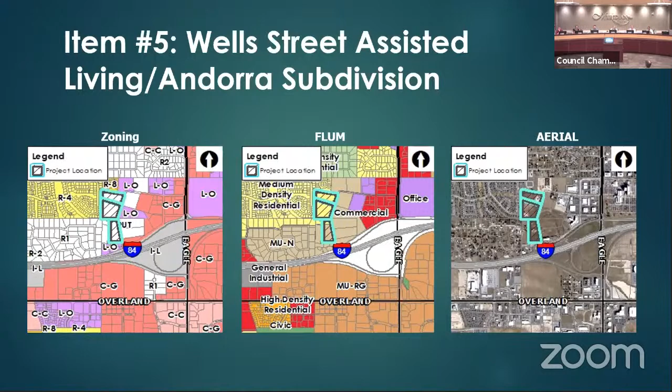A little bit about the history of this. There was a similar proposal approved for these properties in April of 2020, called Andorra Senior Living. This proposal included 76 single-family residences and a 3-story apartment building with 88 dwelling units. Following the council meeting and the approval, the property owners of a parcel that was part of this, 972 East Wells Circle, decided they weren't interested in selling the property, which basically made what was approved fall apart. So what you're seeing now is a new redesigned development that no longer contains that parcel.

The summary of this request is annexation and zoning of 17.5 acres of land with the TNR zone district. It's a preliminary plat for the north half, the northern portion, 61 building lots and 8 common lots, about 11.5 acres. There's a conditional use to allow a 91 unit, 3-story nursing and residential care building with a footprint of 30,000 square feet. I'll show you the graphics. There's also a proposal for an additional roughly 9,000 square foot commercial building, although the end user has not been identified.

There were a few administrative requests. One was to allow 61 private lots to be served by a gated community, whereas only 50 are allowed. And 32 of the required parking spaces will be provided in bulb-outs, which I'll show you. So I'm going to run through this proposal with the graphics and try to explain this to you.

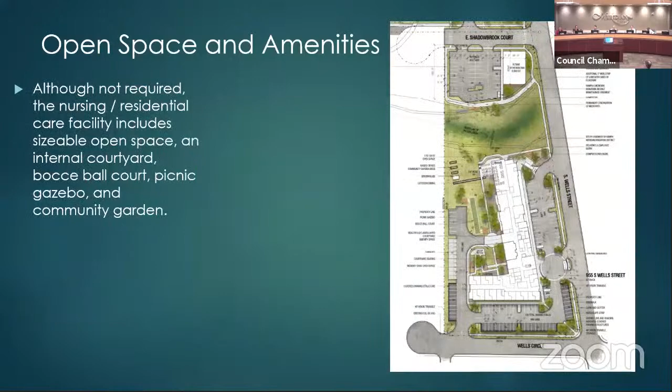There's an informal 10-foot wide pathway stubbed at the west subdivision line. Over here, there's kind of an informal pathway that's there, but it has not been developed.

The Meridian Pathways plan shows eventually there'd be a future multi-use pathway connecting to this. The concept plan as shown does actually show a direct connection. This is where that would be, and they've provided basically a direct east-west connection to this.

There are portions of this pathway that are close to 10 feet wide here, but it narrows down to probably 5 or 4 feet here. Staff is recommending, because this is eventually going to be a major pathway, that all of this would have to be built to a template of 10 feet wide to be consistent with the pathway plan.

Also, what's important to note is that the pathway plan actually shows the pathway running along 5 Mile Creek, which is here. As I mentioned at the beginning of the presentation, this piece of property here with the original proposal that was approved was part of that proposal. This no longer is part of this proposal, no longer under the applicant's control.

So we're not sure if and when this would develop. If it did develop and come into the city, we would recommend that the alignment of this pathway would match the plan, meaning coming down the 5 Mile Creek. However, in the interim, the applicant is also providing this stub here. And if this was ever developed, then this pathway would no longer provide the major pathway - it would run along 5 Mile Creek to be consistent with the original configuration.

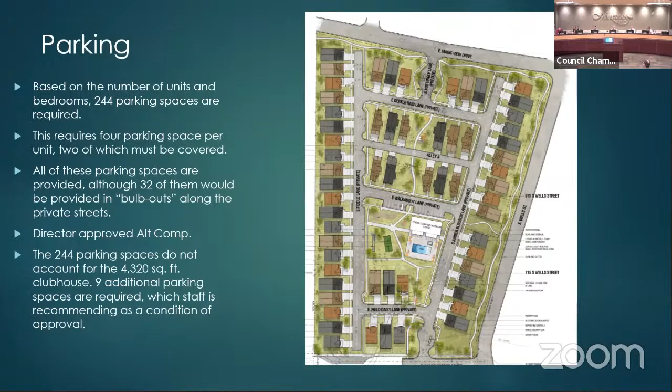For a nursing and residential care facility, the parking requirement is half a parking space per bed. This concept plan indicates 102 beds, requiring 51 parking spaces, and they've shown 101 parking spaces. For the office building, 18 would be required, and they're showing 40 on this concept plan.

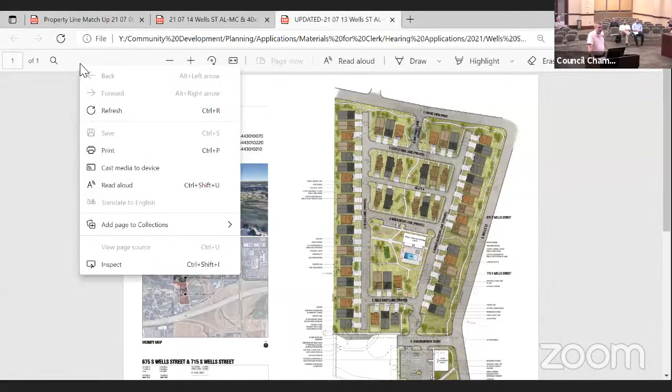Traffic is always an issue in this area. That area is kind of broken, and we don't have a solution for that, but I think that the use we're proposing, out of everything that could be proposed, tends to contribute less traffic than a lot of other uses that could come along. So we feel like that's a good fit also.

To back up to the parking for the north residential area, we are required to have 244, and through the south revisions that Alan spoke about, changing the streets around, we were able to increase the bulb-out areas and get 266 spaces, which is above the 244 required.

Again, we've tried to pay close attention to Woodbridge's concerns and modulate the setbacks and the heights of the buildings. And again, these buildings are going to be very nice, high quality buildings. So I think that works out pretty well. We think that we've done a good job.

We've really tried to minimize that wall effect that some of the Woodbridge neighbors expressed concern over. The previous plan that was approved, made it all the way through City Council, was Andorra, and that project was all single story townhomes, so that was a much longer building. The spaces in between were 3 and 3 setback side yards, totaling maybe 30 feet of open space. In this layout with the skinnier 40-wide lots, we actually end up with 200 feet of running distance, so we think that's a lot better. The design's quite a bit better than it was last time around.

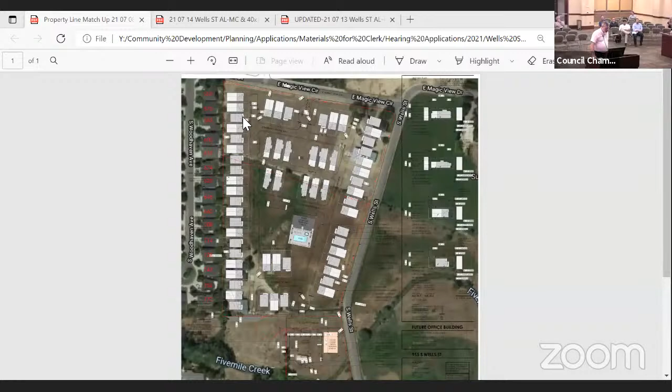Any other questions for staff or the applicant? Just real quick, I was kind of looking for a map that was going to line up the houses on the west there with what's existing. I have that - there it is. Can't figure out how to do full screen on this thing. I've been trying to make the browser go away and haven't had any luck yet. Still not seeing it. Oh, sorry. Thank you.

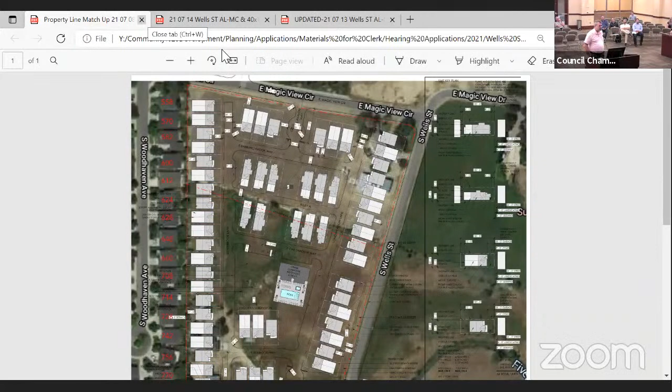Do you want me to leave that up, sir, or go back to the original plan? If you could leave it up for a minute, that's all right. For the commission. Thank you. Madam Chair, Commissioner Casanelli.

Kind of to tie into that, Alan - the 5-foot side setbacks, is that in line with R8 or R15? Bill says R8, I don't have it memorized off the top of my head. And is Woodbridge R8 or R4? They're not in the city. But if you look at the distance between the houses, when I scaled them off, it's roughly the same distance between the houses. The houses in this development are narrower, the lots are a little smaller, but the distance between the structures is comparable to the distance between the adjacent structures.

Any other questions? Sorry. Do you want to show that? I think the applicant wants to see if I have it.

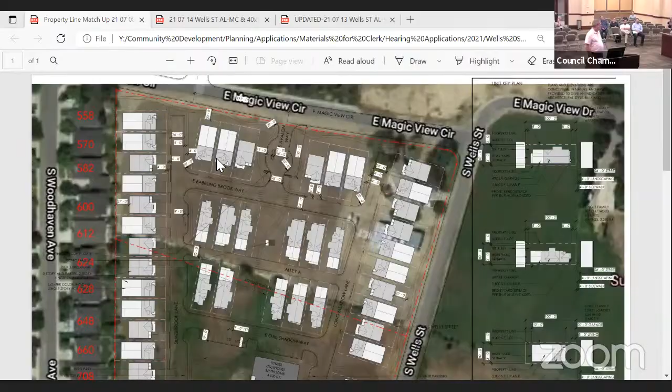Madam Chair, yes - quick question for Jamie on those houses that will back up to Woodbridge here. What are average square footages? Do you have that?

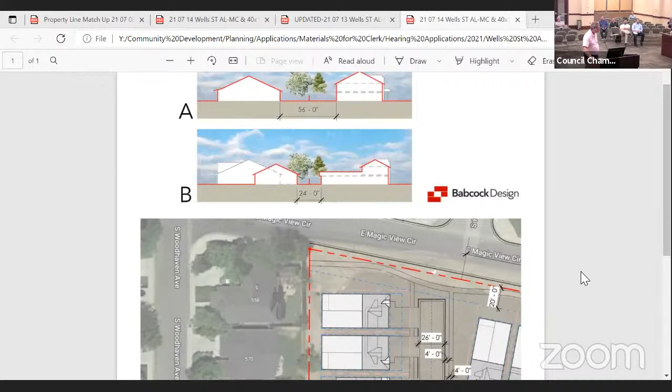You have to say everything into the mic, sorry. I don't recall off the top of my head, but they are listed on the exhibit that we submitted. Are you asking the lot sizes of the development or the adjacent subdivision? No, the average square footage of the houses in the development that back up to Woodbridge. I believe, including the garages, around 1,800. Obviously you've got some 2-story and some 1-story in there, so it's going to be some smaller and some larger. Okay.

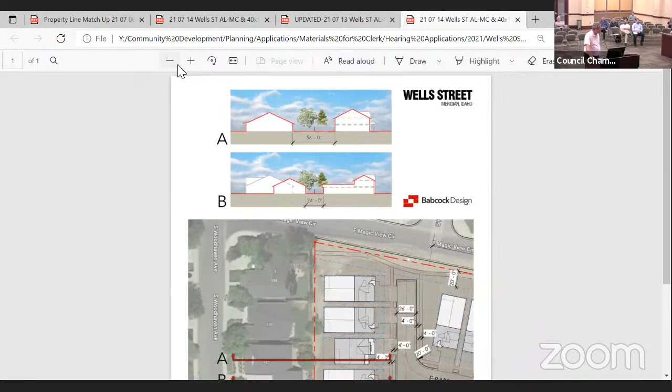Madam Chair, I have another question. Okay, good. And then just either to Jamie or to Alan.

So there is no multifamily in, is that... you went through a lot in the presentation there, and I want, because you talked on that, but I want to make sure that that is not in this application. Is that correct? Agreed that there was a lot.

To the southeast, the assisted living memory care right now is the use that's being proposed. Under TNR, the zone district being proposed, multifamily would be allowed by right, meaning they would not have to come in front of the planning commission. But staff is recommending a condition on the development agreement that says the only use that can occur there is a nursing home and assisted living. So if they wanted to do any kind of multifamily at all, they would have to amend the development agreement.

And it would have to come back to a public hearing. Okay, thank you. Any other questions for staff or the applicant?

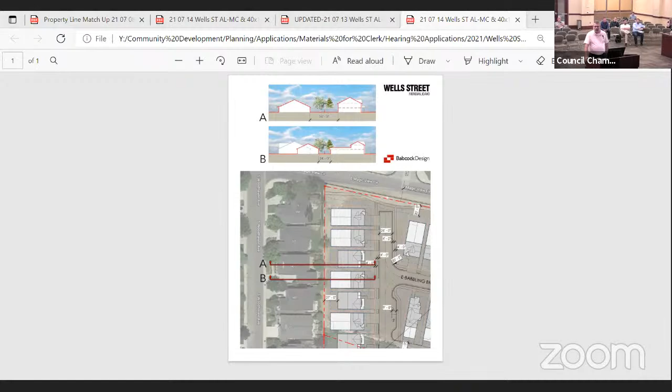Commissioner Gordon: Madam Chair, Jamie, just a question with what Alan mentioned about the clubhouse and the 9 additional parking spots. Is that reflected in the concept plan we saw tonight, or is that something that still needs to be added in? That's something that's in there tonight, it's reflected in the 266 number.

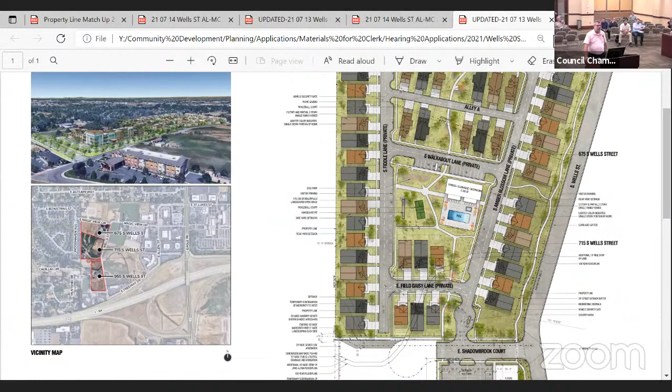Any other questions? Commissioner Casanelli: Jamie, if we could put that last, the plat map up there. The one with the lot lines. Well, not the section one, or the one with the property lines? The plat of the 61 homes.

Is that the proper one? That will work. Okay.

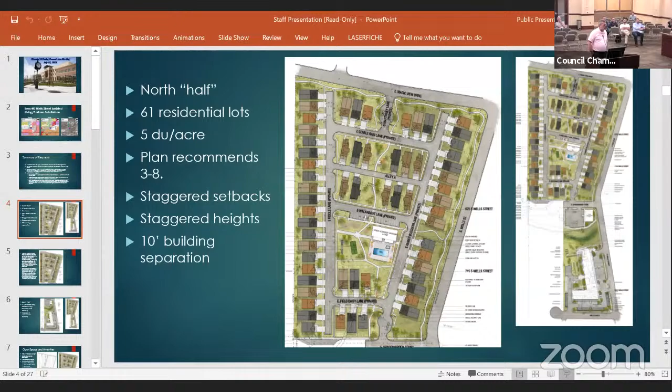The bump outs there for parking on the west side — I'm just wondering, because I was going to bring this up in our comments, but since we're still in open session, I can ask Jamie here. There's really no additional parking; it puts all the parking, I would assume visitor parking and whatnot, on the west side. There's really nothing up in that northeast corner.

Could we shift that island of homes — I guess it's on the south side of Gentle, what is that, Gentle Something Lane — to where the parking is on the east side? You see what I'm trying to envision there? Because there's no additional parking on that side, so anybody that did have to go to the other side of that...

It's a random thought. I have those. It's like Alan has too much information. We certainly could make that change. Any other questions?

Thank you. Madam Clerk, do we have anyone signed up for public testimony on this application? Madam Chair, we have several people signed in, only one indicating a wish to testify. That would be John Overton, indicating he is the representative for the Woodbridge HOA. Thank you.

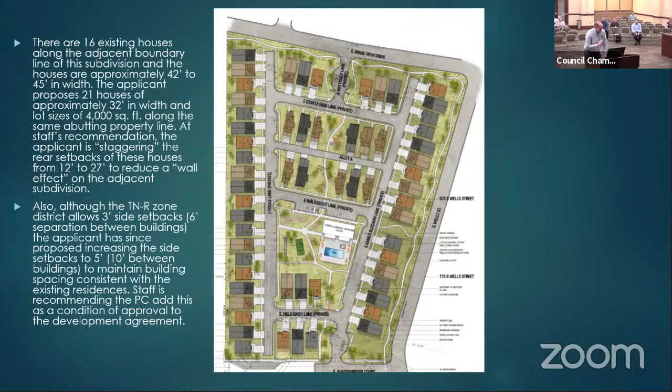The building is a phenomenal building designed by Babcock Design. Jamie's done a phenomenal job with it and his team. We also have a great team with Van Elg and Keith back here with JUB Engineering. We've integrated both the engineering firm and the architectural firm at the very start of this project, simply so we can have the project well designed and maximize its potential.

Excuse me, sorry, I always get a little nervous when I have to do this, and we have so many commissioners. But I just wanted to make a couple of comments.

I value very much the process we have here in this great country of ours, and the opportunity for citizens to speak up and share their thoughts. The Woodbridge community is a very beautiful community, and I respect that very much. They're very interested in what's happening here, and it sounds like it's been going on for years. We've really put forth the effort and expense to make this the best project we possibly can, to make it economically pencil, and to be able to provide a building such as this.

You can imagine this 3-story assisted living memory care building — it's significant in cost, close to around $20 million or more. When we first got some of our bids back, because we'd already gone down the road of designing this architecturally, some of the bids, just because of the costs and the changes, gave us a little bit of sticker shock. So we went back to Alan and said, hey, what are our options?

I just want to make sure it's known that when we said multifamily, we're simply going back to the old apartment design, which is really a 55 and older apartment complex. We weren't coming in with a traditional apartment building. We feel we can make this building work and make this project a great success, although it is more expensive than before. We're building it with steel and putting a significant amount of investment into it.

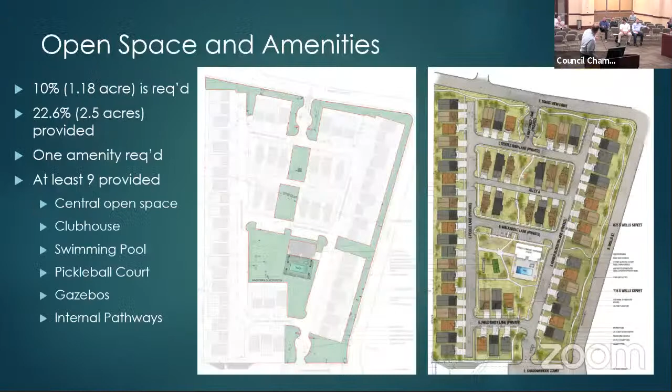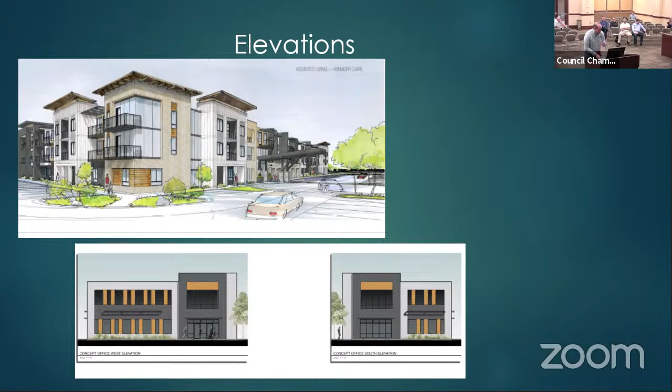We also have the 3-story building—Jamie, could you give me a number, how much percentage done? He said about 25% done as far as construction drawings. So when I say a great expense, these aren't just conceptuals that Jamie did in his office. The little office building down below is kind of a simple 9,000 square foot building. The 3-story building is already in process in design, so we hope to start immediately after approval, if we're so lucky to do so. We'll actually be submitting construction drawings soon after.

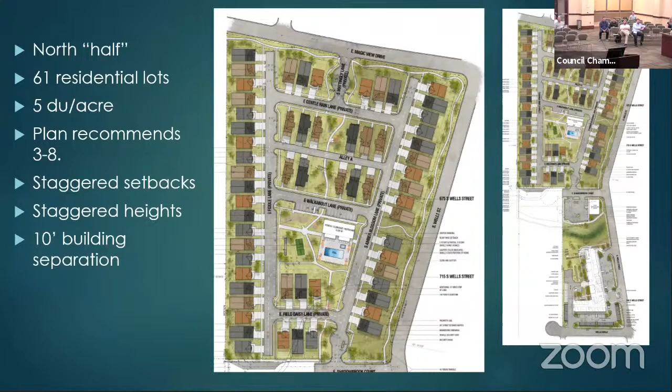Madam Chair, members of the commission, I think that's what Alan alluded to in his presentation to you this evening. From my perspective, when this project was back in front of you a year ago, we were getting that street stub to that county subdivision with the R1 lots, and the plan does contemplate a connection out to Locust Grove to provide relief to Woodbridge.

But again, as this body realizes, that comes with development and redevelopment of other properties. So when we analyzed this project before we even brought it to you, that's something we discussed as staff, we were concerned that now that we're taking out this 5-acre piece that was originally part of it, we've created another roadblock for having that road get extended like we want and provide some of that relief to Woodbridge.

So certainly that's something within your purview tonight. Obviously, you can't make them extend the road, but that's certainly something you should take into consideration as you deliberate on the application tonight.

All said, I like the changes that we've seen tonight, and I'm on board with moving this project forward.

I'll jump in. It is different than what we saw originally, and I think what we saw a year ago, we were all clapping for, but I think this is somewhat the same impact and does fit in the opportunity zone with the nursing care. But I would be in strong support that this is tied to the DA, that it'd be nursing care, that they would have to come back to do anything else with it. Any other high density option.

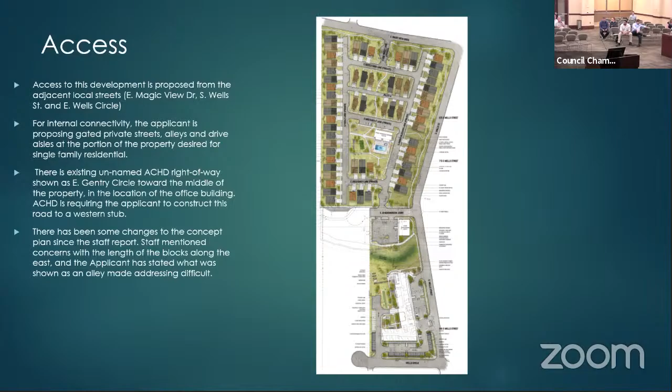Second. Okay, are we clear on the motion, staff? It has been moved and seconded to recommend approval of H-2021-0024 Wells Street Assisted Living and Andorra Subdivision with modifications. All those in favor say aye. Aye. Opposed? Motion carries.

Next on the agenda is H-2021-0040, Brightstar Residential Care Facility, and we'll begin with the staff report.

Sorry, I'm getting caught up with myself.

Okay, this is a conditional use permit to allow a 5,800 square foot nursing and residential care facility in the LO zoning district. This includes a request for a DA modification to reduce a 20-foot wide required landscape buffer, and I'll go through that shortly.

Site consists of 2 lots totaling just a little less than half an acre, zoned LO, located at 333, well, basically on Meridian Road across the street from Settlers Park, northeast corner of North Meridian and East Ustick.

Adjacent properties, R8 is to the north, single family residential. East and south is LO. Before you go, can you put that up on the screen? Oh, I'm sorry, my apologies. I thought we were there. Did it not come up? I thought I had shared it. My bad, thank you, thank you for telling me.

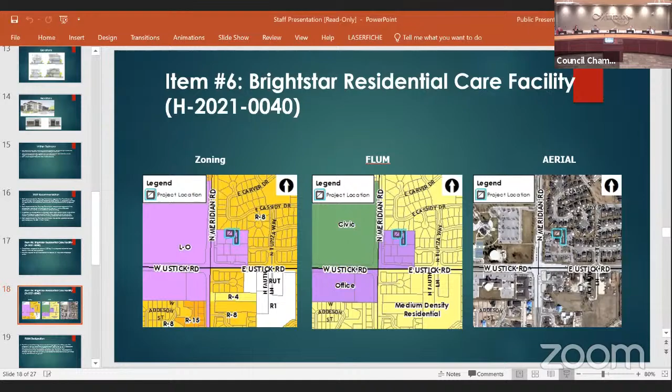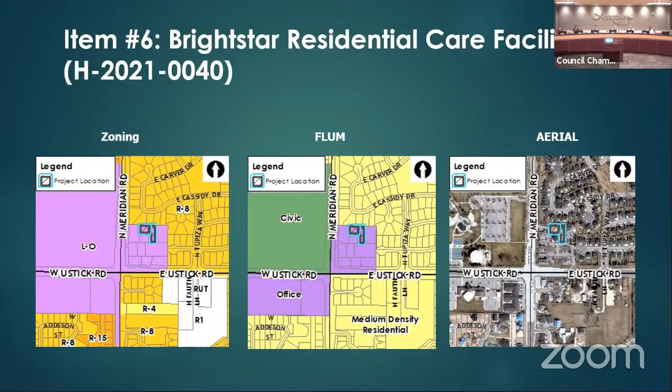Okay, adjacent land use to the north, R8, single family residential. East and south is LO, office and commercial. To the west is Settlers Park. This property is part of the Settlers Business Park. About half of this development has built out. There's these 2 lots and I believe 3 more commercial lots left. The future land use map recommends this property for office uses. However, this proposal includes a nursing and residential care facility. It's important to note, though, that this is zoned LO, and this nursing and residential care facility is a use allowed in that zone district by conditional use, which is why we're in front of you this evening.

Here's a picture of the site plan. What's being proposed is at the top quadrant, at the left. That's what you see in gray. This is a zoom in, so this is part of what's built there now, not all of it.

This is for a 5,800 square foot nursing and residential care facility, for 12 residents, 12 bedrooms, up to 2 staff. It's surrounded by existing commercial, most of it's built out, with 3 more lots left. All of the parking and driveways are already there.

Under our code, you have to provide 0.5 space for every bed. This would require 6 parking spaces, not including the office for staff, which would be a few extra for 2. The parking regulation doesn't mention the parking requirements for the 2 staff. However, at the time of the CZC, the applicant will need to give us how big that office is.

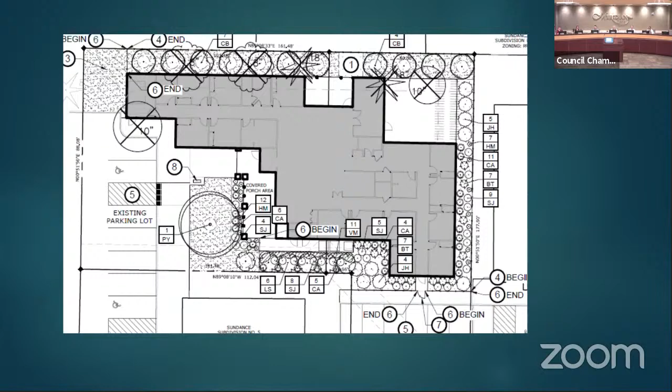Another issue is about east-west pedestrian access, and maybe the applicant can describe this a little better, but we're concerned about, in order to do this memory care, one of the requirements is they have to have fencing. It's not super clear to staff, and it wasn't super clear in the development review meeting, whether there is sufficient unimpeded access from the west lot to the east. We wanted to make sure, so we're just having a condition of approval that at the time of the CZC, the applicant will demonstrate that there's sufficient unimpeded access along sidewalks or walkways from the northwest to the southeast.

Last issue is a lot merger, which is not much of an issue, but there are 2 lots, and this building straddles those lots. This is something that could be done administratively, so the applicant would have to merge the lots as a condition of approval. With that, we recommend approval of this conditional use to allow the nursing and residential care.

We recommend that you discuss whether you support the DA modification to allow a reduction to the landscape buffer. If it goes to the council and the council does not approve this DA mod, then the applicant would have to revise the drawings to meet that 20-foot buffer. With that, that completes my presentation.

Okay, thank you. Would the applicant like to come forward?

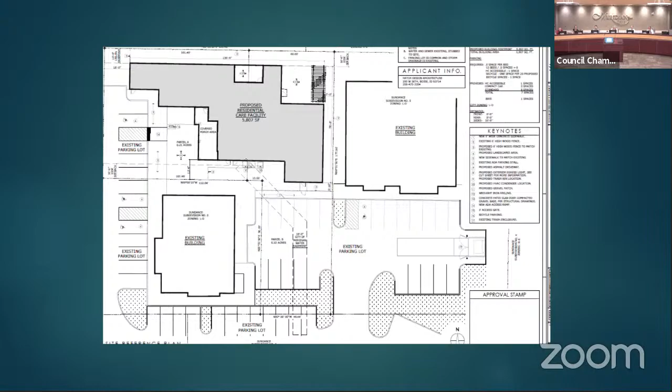Good evening, Jeff Hatch with Hatch Design Architecture, address 200 West 36th Street, Boise, Idaho, 83714. Good evening, Chair McCarvel and Commissioners. Thank you for your consideration of our conditional use permit application this evening. I do have a presentation. I'm working on it.

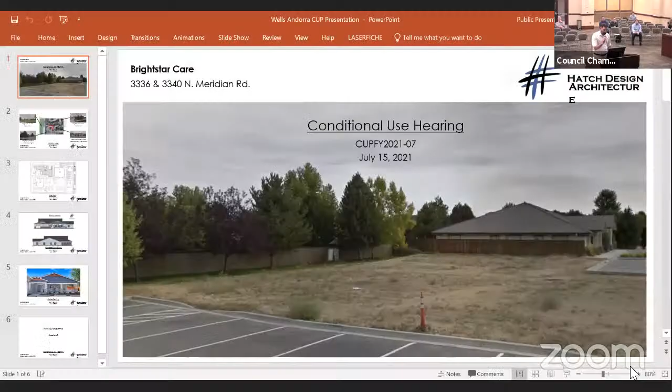While Alan's getting that up, I'll elaborate a little. Brightstar Care is a residential business, and this is their corporate office for the people operating this and other agencies. We have several different locations around the Treasure Valley, all operated out of Boise locally. So these are local business owners operating a local residential care business here in the valley.

As Alan mentioned, this location is in a business park adjacent to a neighborhood. We typically like to place these in infill lots in neighborhood communities, or in a transition area between a commercial business park and a neighborhood. We found that having neighbors on one side that are residential and commercial on the southern side creates a transition and a nice buffer between the more commercial use and more residential use, and that transitional use of residential care we're really wanting to achieve.

A couple things that make it a little unique is we really try to design these homes to be just that, dwellings. They have a residential feel and a residential look, and the people that live there enjoy that, it's like living in a house, because that's the intent. It's a very different model than what was presented previously. This is about being able to live and feel comfortable in a space that feels like a home. That's kind of the key to Brightstar.

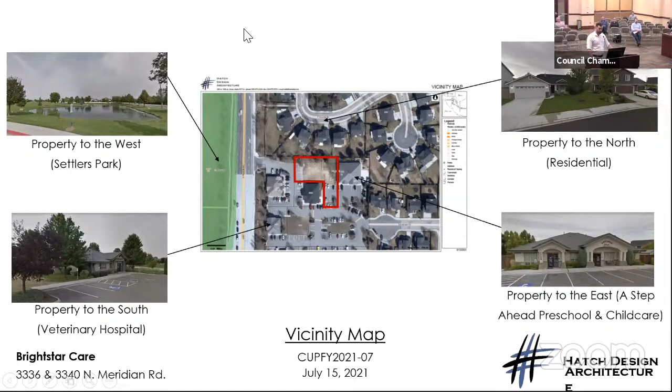Part of the joy and excitement we have about this location is being next to a daycare, because many of these elderly individuals don't necessarily see their family every day. Being able to hear little kids having a good time, laughing and playing, helps them have a more positive outlook on life day-to-day. We feel being nestled to that daycare facility will help the individuals living at this community, but also lends itself nicely as a complementary business to that daycare.

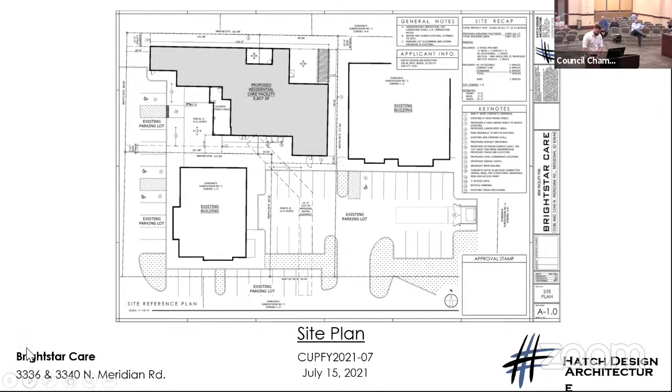As staff had mentioned, a couple conditions of approval, we're in agreement with everything staff had mentioned. As far as the access path, that is not currently shown, but can be easily proposed and adjusted, and that's something we can do through our CZC. We feel very confident in design review.

Again, you can see here in the site plan this is where that designated property line is between the two, a kind of blending of the residential style to the north and the commercial business park.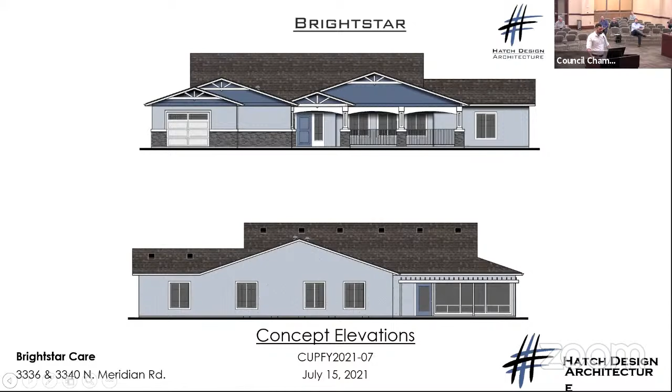We're keeping with the same language that we have in most of the branding of this community. It's one story, low profile, very residential in nature with the porches. We did go to a stucco because the business park is predominantly stucco, and part of the architectural language of that business park is to do something that ties in, so we wanted to make sure we were complementary to that.

As far as an example of what these residences look like, this is one that was recently finished, so we wanted to show you that as a comparison. It is very residential in nature, and in some cases, such as this location, we actually use the word resi-mercial because it really is that transition between the two. With that, I'll stand for any questions.

Any questions for the applicant or staff?

Madam Chair, Mr. Yearsley: so you show a garage door. Can you show me on your plan where that's supposed to be located and how we're going to access that? Good question - the garage door is not a garage. It's for servicing and delivery, predominantly used for storage. It's not even deep enough to store a car. Again, the intent is to make it feel and look like a residential dwelling and function as a residential care facility.

Would you show me on your plan where that's located? It would be on the far western side. Okay, thank you.

Madam Chair, Mr. Casanelli: I have two questions. Number one, without the reduction in that 20-foot landscape buffer down to 10-foot, will this not work? Commissioner Casanelli, the state has certain requirements on square footages that we have to have for bedroom spaces and also commercial space, dining room areas, and so for the proposed 12 beds, this functions very well.

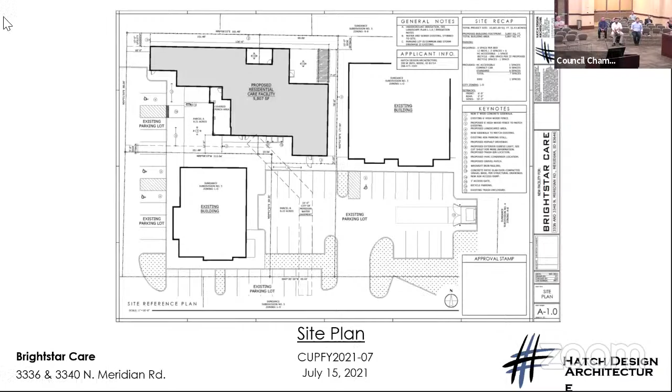Thank you. Okay, with that being said, could I get a motion to close the public hearing on H-2021-0040? So moved. Second. It has been moved and seconded to close the public hearing on H-2021-0040. All those in favor say aye. Aye. Opposed? Motion carries.

Madam Chair, I'll start. Great, thanks, Commissioner Lorcher.

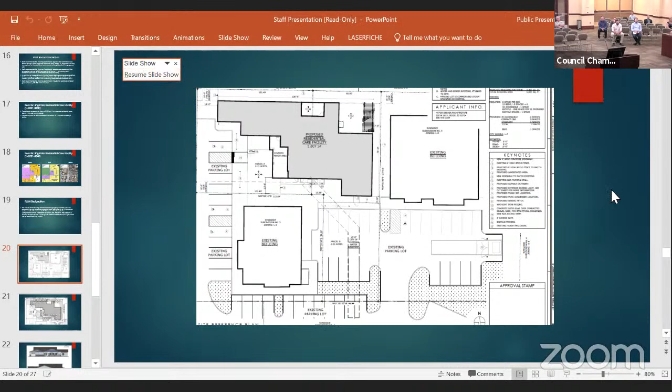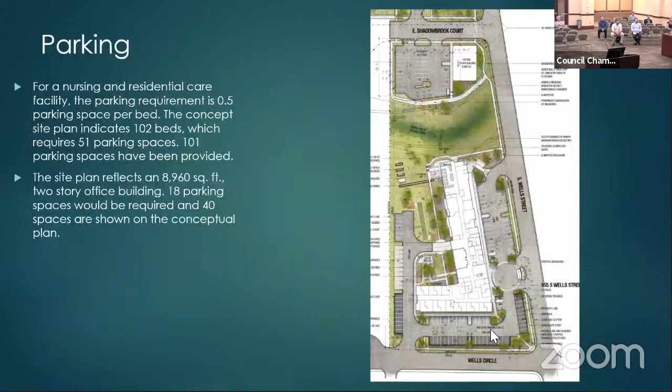When I first was looking at the map, I was very confused why someone would want to build a residential area among the asphalt of an office building. I looked at the proposal before we came tonight, and I went on the internet a little as presentations were being made to see how the facility looks and works. Considering there's an assisted living facility literally less than half a mile away across the street, it seems these types of facilities are popping up where you can fit them, and this type of community living seems to be in favor, especially with older adults. My own mother is in a community, but it's a high-rise type community. I think if you can sell it and they will come, then more power to you.

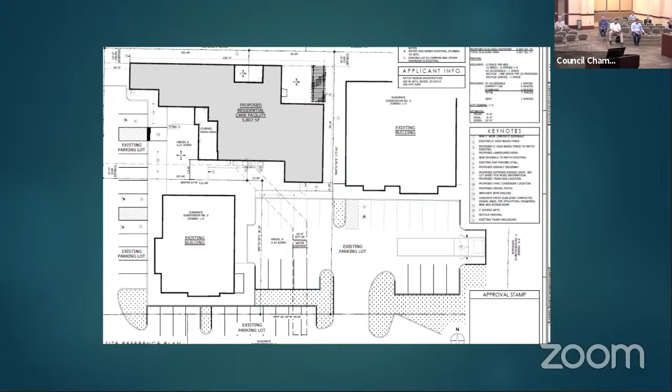Second. It has been moved and seconded to approve file H2021-0040. All those in favor say aye. Aye. Opposed? Motion carries. Congratulations. Thanks.

Next, we have H2021-0041, the WRRF map amendment. And boy, do we have staff here tonight. We'll start with the staff report.

Thank you, Madam Chair, members of the commission. It has been a while, so it's my pleasure to be back before you presenting on WRRF, our water resource recovery facility out near 10 Mile and Ustick, as you can see on the first slide. Before I get into the presentation, I want to thank Bill Parsons, Sonia Allen, who's out right now, but they helped draft the staff report and work with us. I've been working with Public Works over the past couple months on this application, but they've done a lot of the heavy lifting to get the items you see in your packet. So thank you to staff for that help.

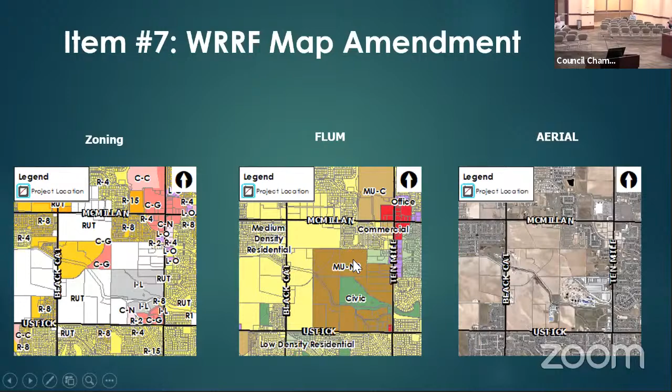As I mentioned, this is near our wastewater treatment plant, another way it has several names we refer to it as, but it's where our wastewater is treated out near the northwest corner of 10 Mile and Ustick. Earlier this year, the city did purchase an additional 40 acres just north of the existing facility. That prompted Public Works to start talking with planning staff about a change to our future land use map. What you see at the top of this exhibit is the current designation on our comprehensive plan future land use map. The designation of that 40 acres, and several of the properties around the wastewater treatment plant, is designated mixed use non-residential, so as you'd anticipate in the name, it doesn't allow anyone to live in those areas.

And I'll let Lorelei McVeigh, who's in Public Works, speak to you a little bit about this more. She has a couple slide presentation, but they recently completed an odor study. And based on that study, planning staff is recommending some changes to our future land use map that would allow

some of that area to be opened up to residential uses in the future. Again, because the odor, the nuisance essentially isn't there, or it's there very, very minimally throughout the year. And again, I'll let her get into some of those statistics.

In the application, what Public Works applied for, and it's partially my fault, I feel, I think eventually a lot of what the city owns will be zoned industrial. Their application was actually to change it from mixed use non-residential to industrial.

After we talked about it a little bit more internally, what staff recommends you approve this evening, or recommend to council approval, is actually a civic designation. That matches, and it is truly the intent of our Public Works Department is to keep this civic in city

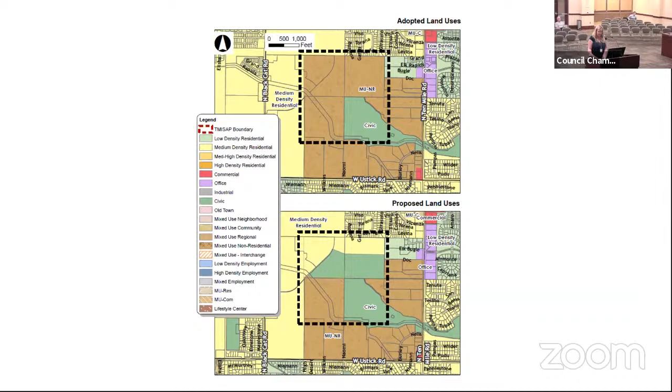So as far as our odor study, so what an odor study is, it is a scientifically based study that uses several variables, including odor sampling at the facility, and then it also looks at local wind and temperature data.

So when those are combined in an EPA-approved model, they predict worst-case odor conditions. It's important to remember that this predicts total odor, not just good or bad odor. And as you can imagine, odor is very subjective.

But what this study will do is we'll show you where the highest total odor is, where that odor is expected to go, and how frequently that odor is expected to go there.

So a couple of things are important to note. The last odor study was completed in 2004. But what's also important is that that odor study didn't set the land use designations around the WRRF. Those were set in 2002 prior to that study.

A couple of other additional important things is the original 2004 odor study only used best known industry values. For this odor study, we took 43 actual samples in the field and at the wastewater plant to give us the best data possible.

And then since 2004, the city has also installed significant odor control upgrades at the facility, which has greatly reduced odors. And one of the really cool things for us was at the neighborhood meeting, the neighbors echoed that odors have

significantly reduced over the years and how rarely they actually see odors anymore. So that was exciting for us to see that our odor control investments have made an impact and are doing what we expect them to do.

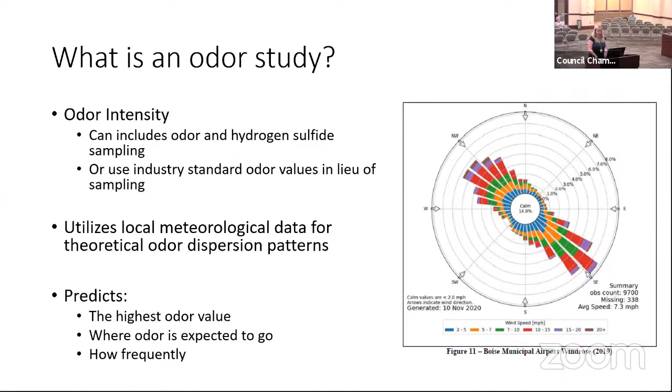The city is also currently installing several more odor control upgrades in the next few years, which will pull our odor profile in by another 67%. So this is what our odor map will look like once those upgrades are complete.

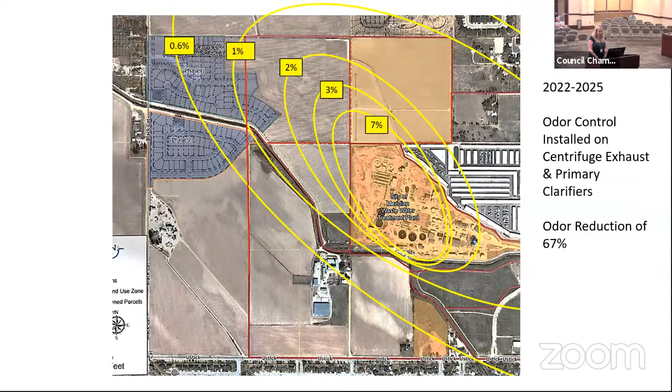One thing we also did is we wanted to model full conditions at full plant build out so that we didn't make decisions today that could potentially have negative long-term impacts. At full facility build out, estimated to occur in 2074, and with additional planned odor controls at the facility, we can pull those odor rings in even further and have really little impact on any of the surrounding areas outside of the wastewater plant property, which is really our ultimate goal.

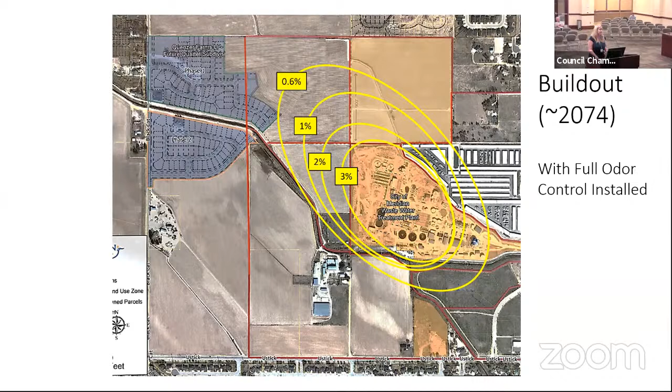So in summary, based on the findings from our recent odor study, we feel the proposed land changes will still retain enough future buffer space for the wastewater plant, but not over restrict additional development in the area in the future. With that, I appreciate your consideration and we'll stand for any questions.

Do you have any questions for staff?

Madam Chair, Mr. Casanelli: What are the potential plans for the civic space? Is that going to be park space, or to the north of the treatment plant? Great question. We don't currently have any plans, but what we intend is that that area would be used for either future wastewater process equipment.

Two things change why we need to expand the wastewater plant: growth, meaning the volume of wastewater we receive, and also regulations. If EPA or DEQ came with future regulations that required more equipment, we would potentially use that land for future plant equipment. But primarily our goal right now is just to retain that open buffer space, knowing that we don't want anything too close to our facility.

And another question, if I may, on the odor. You said it was subjective, good odors and bad. Can you find me somebody that thinks wastewater would be a good odor?

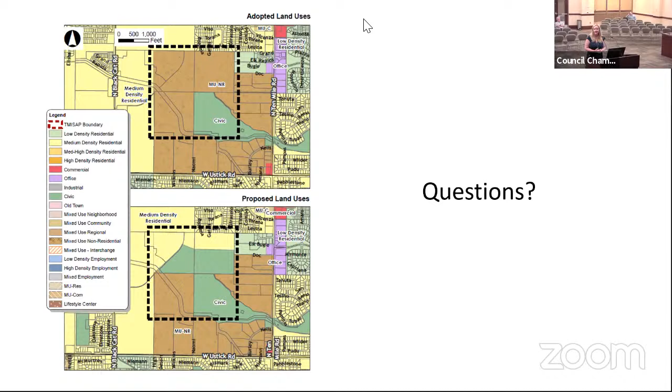Madam Chair, Commissioner Grove: not really a question, but just wanted to congratulate you on the work you've done out there. I was lucky enough to get a tour with Leadership Meridian earlier this year, and that first step, you're like, oh okay, that's a little rough, but outside of that, like I don't know, a 50-foot radius, it's really not that bad anywhere, further into the site.

And they've done an amazing job at really reducing some of those odors and making some major advances in how they've done things. If you haven't been out there, it's rather impressive. They have like 100 structures out there.

So it's quite intense in what they do and how they do it. I appreciate the work that you've done. Madam Chair, I've got a storage unit just to the east there, and I've never smelled it. Not the earthy smell or the sulfur. Thank you.

Madam Clerk, I'm guessing we don't have anybody signed up to testify on this application. That's correct. Just on the outside chance, is there anyone in the room who'd like to testify on this application? No. Oh, Caleb, I don't know if Mr. Wardle wants to testify. No.

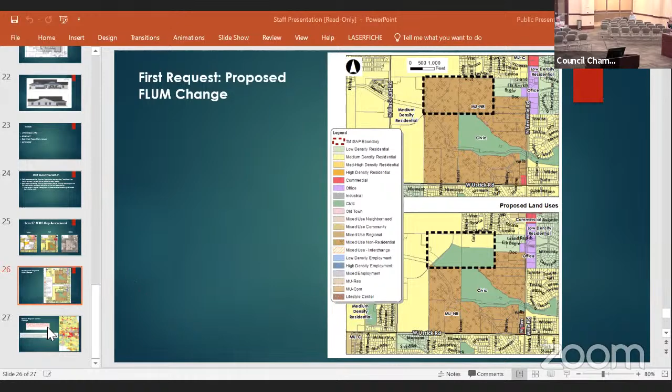Real quick before you move any further. Again, these are pretty much administrative changes. There are 7 or 8 of them. For example, Keith Bird Legacy Park today still has a halo around that park. That park exists, so it's not a future park, it's an existing park.

We have a couple of those. Discovery Park exists. So some cleanups like that where schools have come online in the past couple of years, and we just want it to be accurate on our future land use map that those aren't planned, they actually are on the ground. So again, very administrative or cleanup in nature.

Clarify for the public. So with that, I would stand for any questions you have on either of the administrative changes or, again, back to the wastewater resource recovery facility map amendment. Any further questions? Okay, thank you.